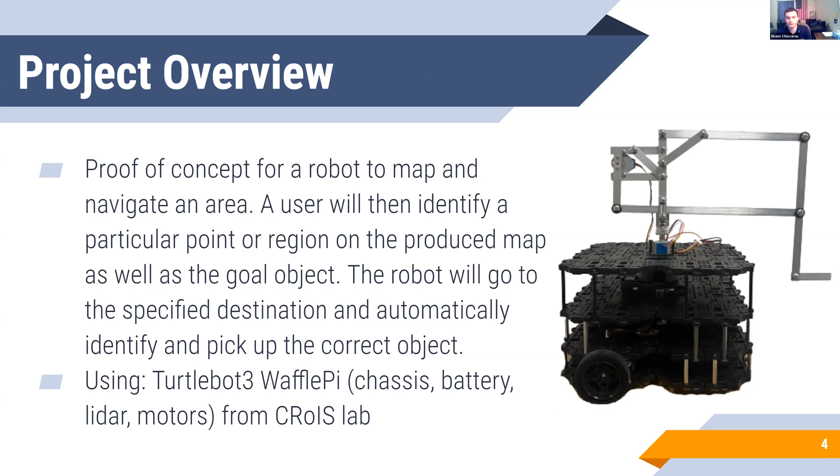So then just to comment on our project specifications. So we're planning to map and navigate a standard room of 11 by 12 feet. And then our mapping completion time should be accomplished within under 2 minutes. The object size that we're planning to pick up is 3 by 6 inches. And then the object weight is between 4 and 8 ounces. The time to identify an object is 1 second per object. And then the lighting is typical standard room lighting at 500 lumens per meter squared.

So next, we're going to walk you through our project plan. So just to give you a quick overview, we have our Gantt chart. So the first part of our project focused on research and design. And then the next part was development. Then we had fabrication and assembly, testing, and documentation. So now at this point, we're going to kind of take a deep dive into each of those sections and walk you through how we worked out all of those things through our project.

So this is our current project status. So task 1 is research and design. So it was concept planning, parts research, system design, mechanical arm design, and designing the objects that were to be retrieved by our robot, as well as ordering parts.

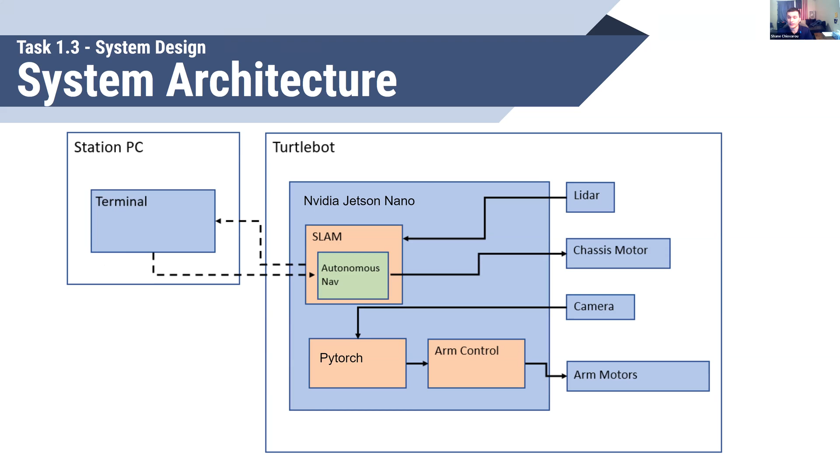So this is our system architecture. It was sort of our backbone for what we wanted to construct throughout the entire project. There's 2 main modules going on here. On the left is the station PC, which handles a lot of the calculations and major communication between our application and the robot itself. The other one, of course, is the robot, which houses an NVIDIA Jetson Nano, which is our sort of mini computer that's going to handle the object identification portion of it. So as you can see there, there's some blocks breaking down different parts of it, but all of the pieces that are actually collecting the data start on the TurtleBot and are transferred over to the station PC.

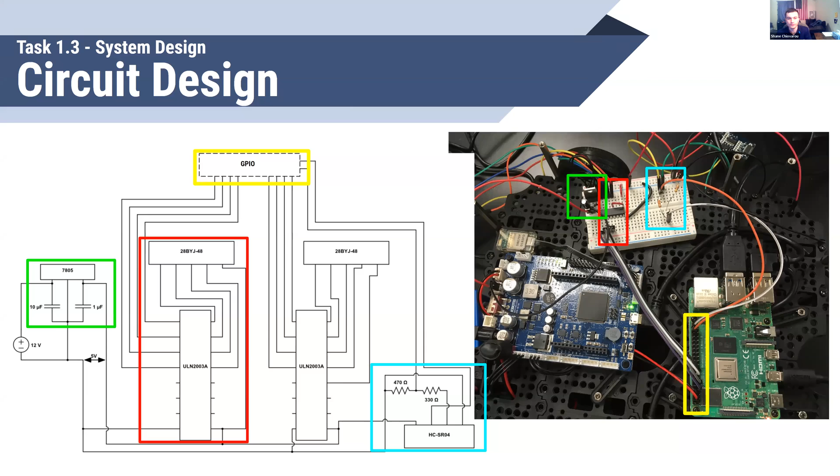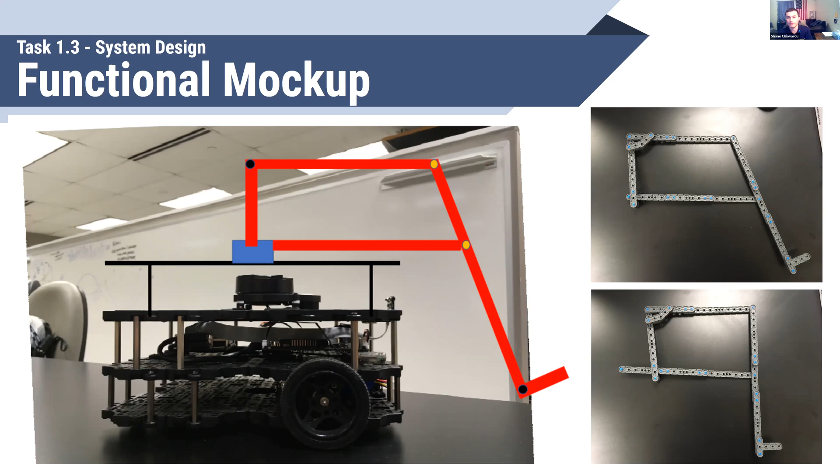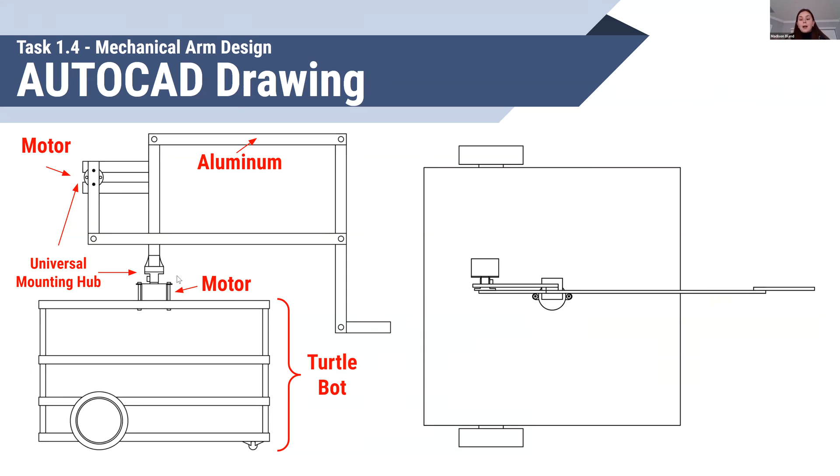So I'm going to take a brief second just to talk about ROS and Ubuntu, which is a major part that allowed the robot system to function in general. So ROS stands for Robot Operating System. It's a framework that helps you write robot software. It includes lots of tools, libraries, and conventions that help with this type of development. And it's also open source and is designed to work with different versions of Ubuntu, which is an operating system on a computer. And we're currently using version 18.04 with the Melodic release of ROS.

And then for one of our last tasks in this first research and design phase, we have our retrievable object design. So we designed these objects to be able to be retrieved by our mechanical arm that we built. So we want it to be able to hook these blocks and be able to return them to the user.

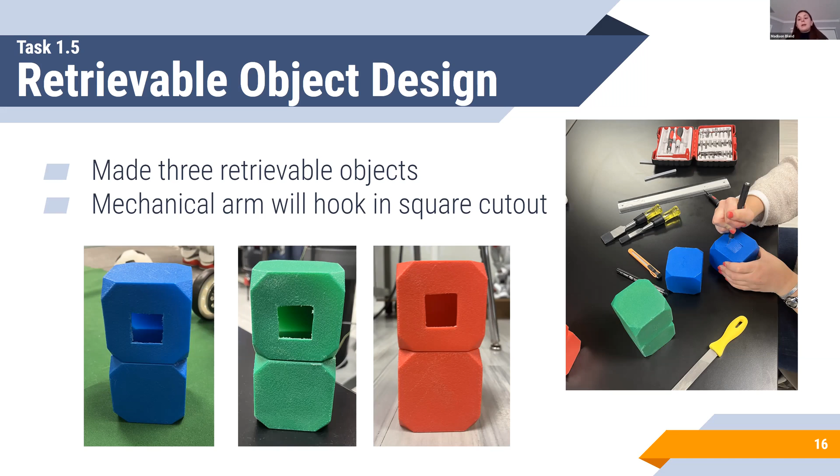So next we have task 2. So this is going to be where we really start to develop some of our software and implement a lot of our tasks that we're planning on doing.

So the first thing I want to talk about is the room mapping, and that's powered by what's called this LiDAR sensor. This stands for light detection and ranging, and the specific one we're using is a 360 laser distance sensor, LDS-01. The way that this works is beams of light are sent out periodically, and the environment will reflect these beams of light back into the sensor.

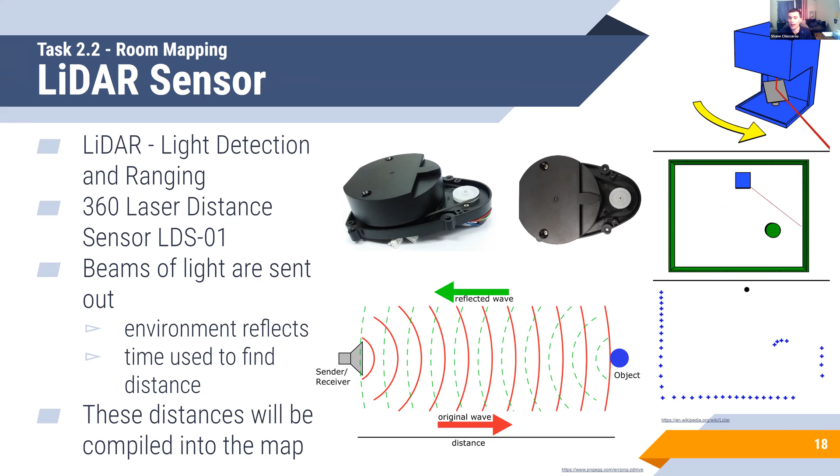So next, talk about simulation. So this was a huge help in terms of development for a lot of the conceptual work, since there's a fairly big gap between what you've coded for something to work and it actually working on a real robot, because there's lots of different factors that are hard to take into account.

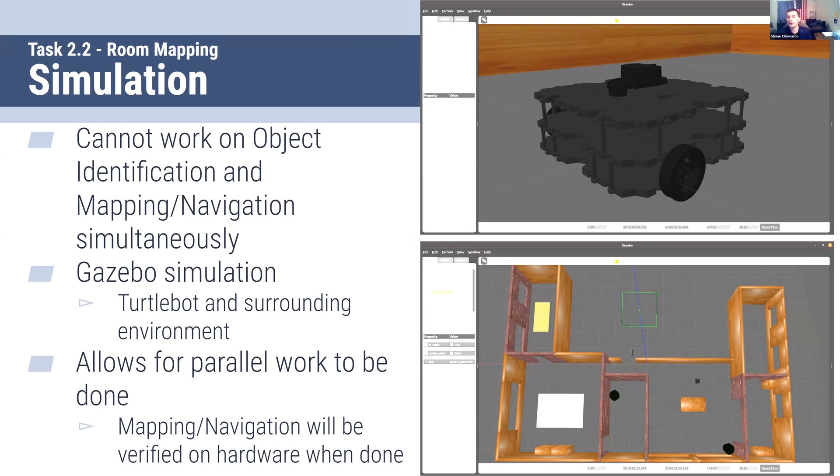And there's also the issue of we only have one robot, and Maddie and I needed to work on different portions of it simultaneously. So I set up a simulation environment in Gazebo, which allowed for parallel work to be done. So you can see there's a little model of the TurtleBot, and we're using this space here, and we wanted to map one major room in this house.

And next I'm talking about autonomous navigation. So once the map is produced by driving around the TurtleBot, I wanted to make a way to have the robot navigate to some goal destination point.

On the right, there is a picture of a map produced by the TurtleBot, which I'm going to talk about a little bit later. But on the left is an example of autonomous navigation. That red arrow on the bottom is the goal position and orientation. And the line between the robot and that point is its current planned path.

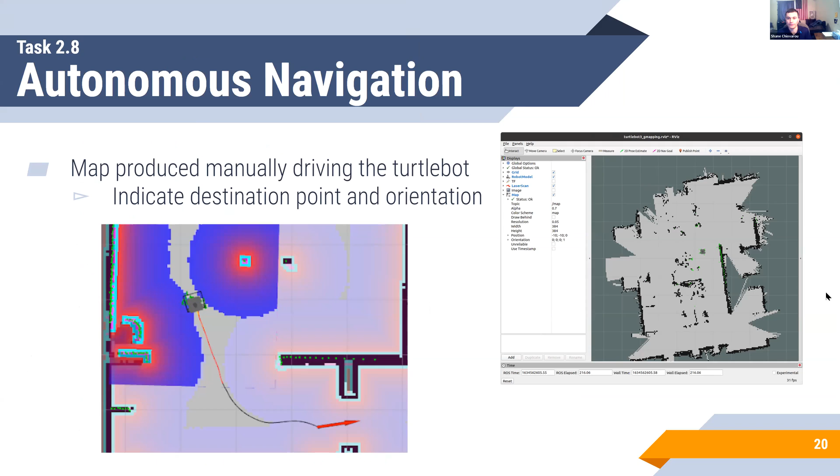So now I'm going to switch gears and talk about our object detection system that we set up. So as you can see, these are all images that were collected from around the lab, and it's of the different types of blocks that we're going to be retrieving. So a neural net was actually trained to be able to identify these different blocks. So 80% of the data was used for training the neural net, and then 20% of the data was used for testing that.

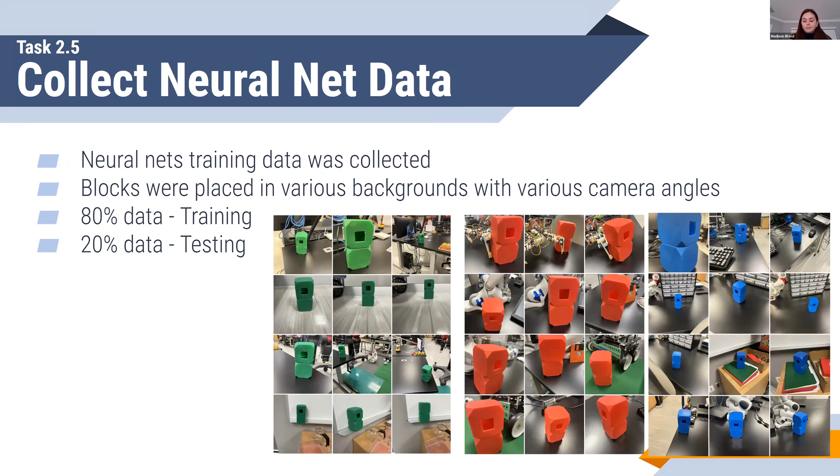So then for testing, we have the blocks placed in all different backgrounds so that we would be able to see how well our neural net was actually working. So in order to get this working, we used PyTorch, which is an open source machine learning framework. And we use this in combination with the YOLOv5 object detection algorithm.

So when using these two together, we're able to feed the algorithm all of our data and then be able to test this algorithm by providing it with more data. And then we see that it was able to successfully identify the different blocks. So as you can see in some of these images, in this block, it identifies the block as red. And then in this image, it identifies the block as green. And we were able to do that with multiple images, as you can see.

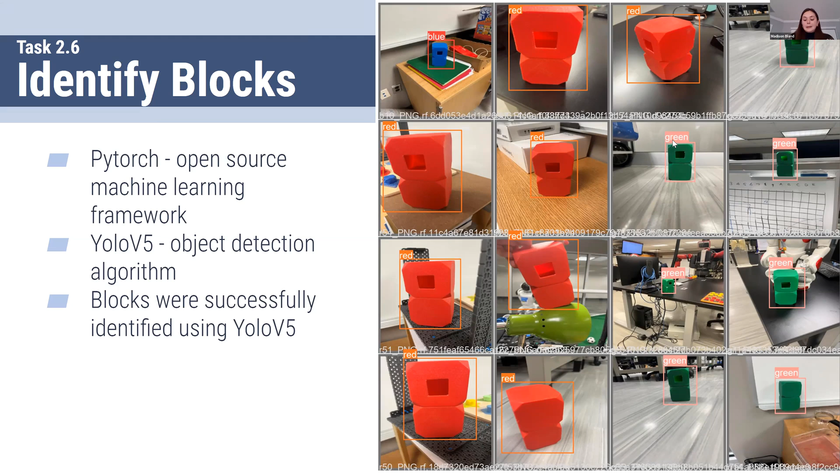So then for task 3, this is our fabrication and assembly. So in terms of assembly, we were able to fully construct our mechanical arm in the machine shop. So we were able to cut out all of the aluminum and fully construct that arm. And the only thing left with that is we're planning on attaching a camera for the robot to be able to actually identify the objects in real time.

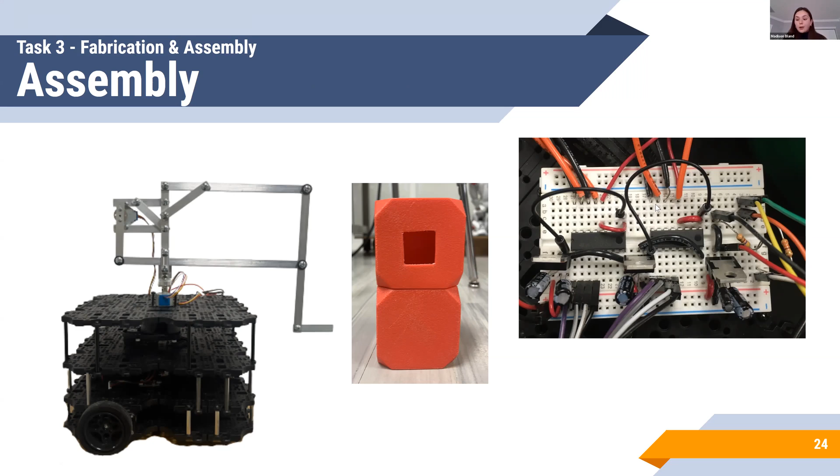And then we have our blocks, which are fully assembled, as well as the circuitry for the mechanical arm to be able to move back and forth and push and pull.

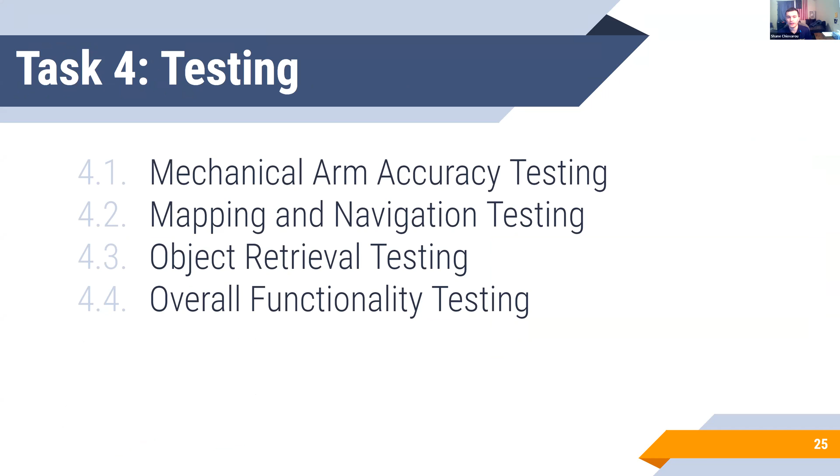So our next task is, as I said earlier, testing, which includes mechanical arm accuracy testing, mapping and navigation, object retrieval, and overall system functionality. So I'm going to bring you through a few videos that actually demonstrate this functionality.

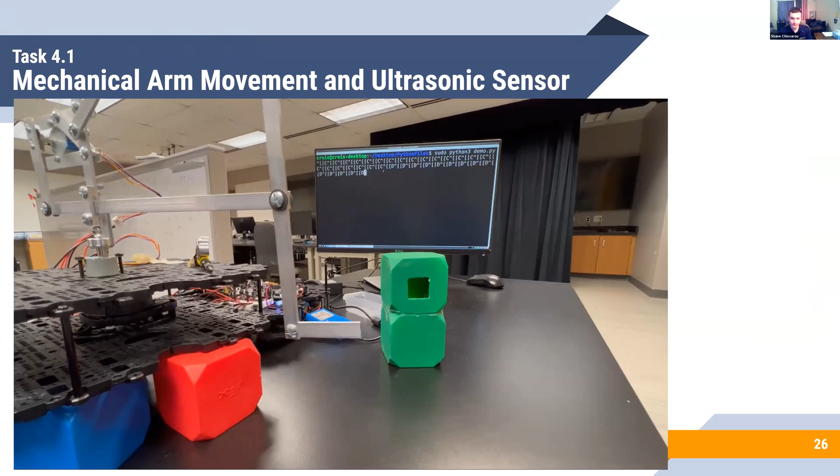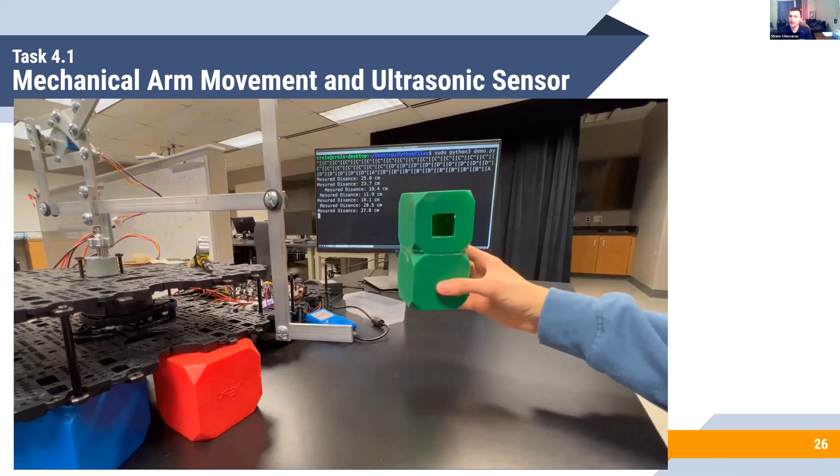This first one is mechanical arm movement and ultrasonic sensor. Hopefully it won't be too laggy, so you can see it's able to rotate in this direction and now actuate forward and backward. Now, I don't know if you can see it on the screen on the back, but I'm going to grab this block right here. The ultrasonic sensor is right under the arm, and it's able to detect the distance that I'm holding that block away from it.

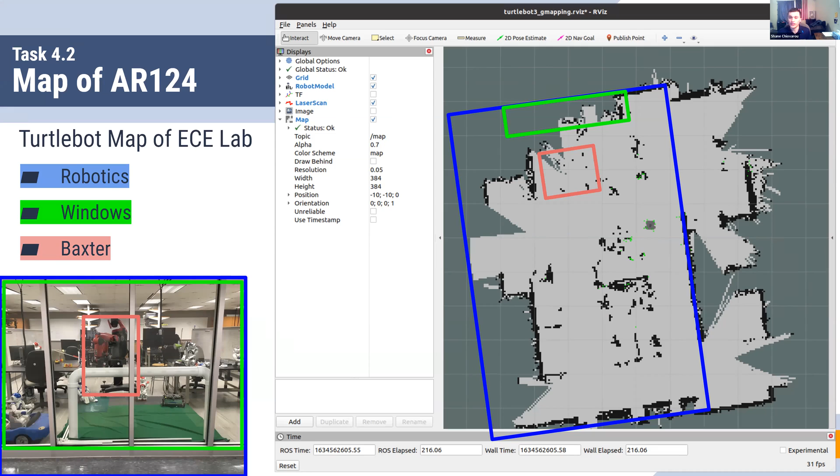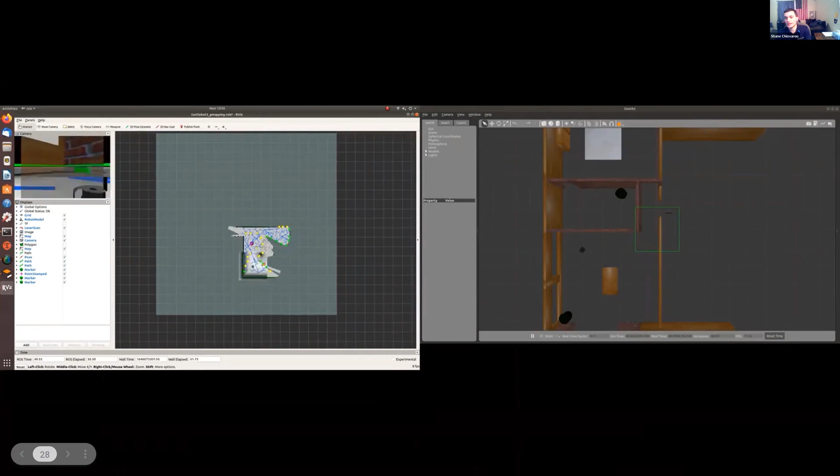And the last one is autonomous mapping in real time. So in this video on the left is the mapping portion of it. I know it's a little hard to see because I was working on two screens, but on the left, I'm currently placing down my points, which is going to dictate the area in which the robot will search. And now it is currently starting to search and map the space. As you see, that white map is filling in. On the right is the simulation space. And here is that room that we wanted to end up mapping, actually worked in simulation.

And then just in summary, our main goal was to map an unknown space with our TurtleBot, and then be able to autonomously navigate to that space, identify a block using machine learning, and then develop a scheme to pick up our desired objects. Does anyone have any questions?